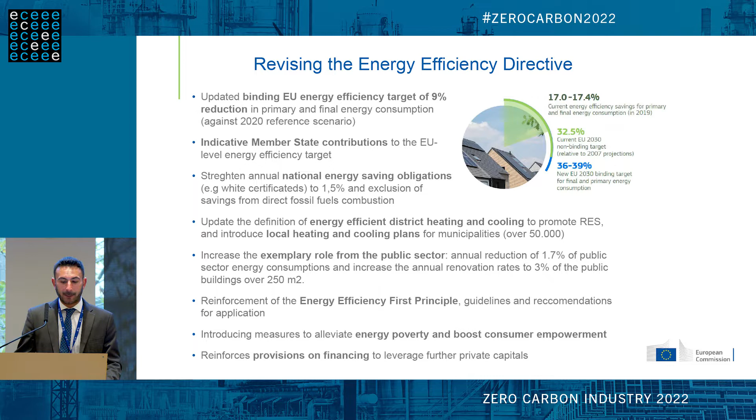There is something related to industry and SMEs in there, and that's the EED, which, as you know, was recast, increasing first of all the ambition of targets for primary and final energy consumption, but also looking into updating and revising the obligation for companies to undergo energy audits every four years and/or having an energy management system.

Now, what came out from an impact study the Commission carried out was that in the current Article 8 of the EED, placing an obligation on businesses bigger than an SME - when we mean SME, we refer to the 2003 Commission recommendation on the definition of SME - member states were facing many problems implementing that obligation, precisely due to the difficulty of applying that definition at country level, since it may vary from country to country, and also the fact that there was no obligation to implement measures recommended by the audit, which would undermine the role meant for them to have.

So this recast is proposing a shift of the obligation from company size to the energy consumption of the company. Currently the threshold proposed by the Commission is 100 terajoules for the obligation to have an energy management system in place, and 10 terajoules for an energy management system or an energy audit. The latest developments are that the European Parliament is trying to go even beyond, proposing to lower these thresholds, which would practically increase the number of companies that would fall under the obligation.

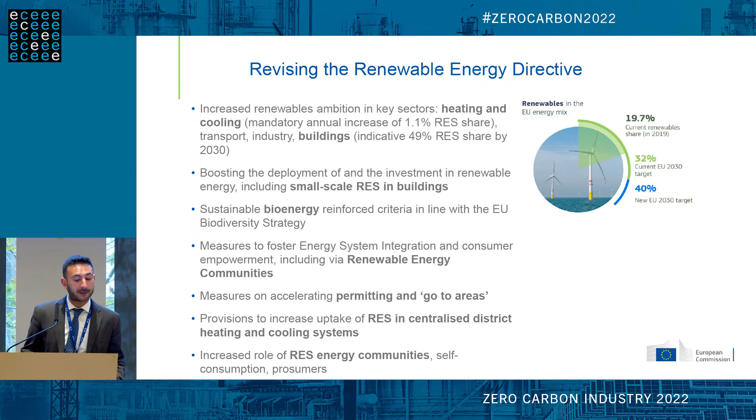That's an opportunity for them, and that's for the longer term, what the Commission is doing to support businesses in the clean energy transition. In the shorter term, REPowerEU is the instrument the Commission has put forward to phase out dependency on Russian fossil fuels by 2027. Rooftop solar, heat pumps, and renewables in general are at the core of the strategy, based around three pillars: accelerating the clean energy transition, reducing demand by becoming more energy efficient, and diversifying energy sources.

Linked with energy audits, as part of REPowerEU, the Commission issued the EU Save Energy communication, which, on top of a short-term and long-term view, in the short term calls for energy savings through small behavioral changes that everyone, including businesses, can make. On top of the long-term outlook, which looks at strengthening structural change towards energy efficiency, the Commission was also asking member states to consider additional measures and improvements, amongst these, the strengthening of the implementation of energy audit results. Why is that?

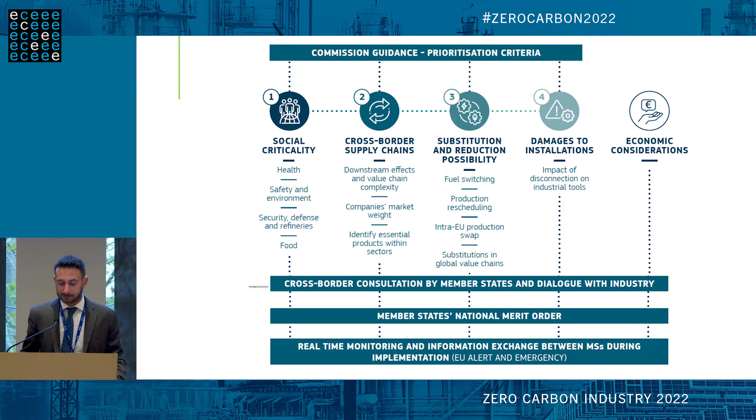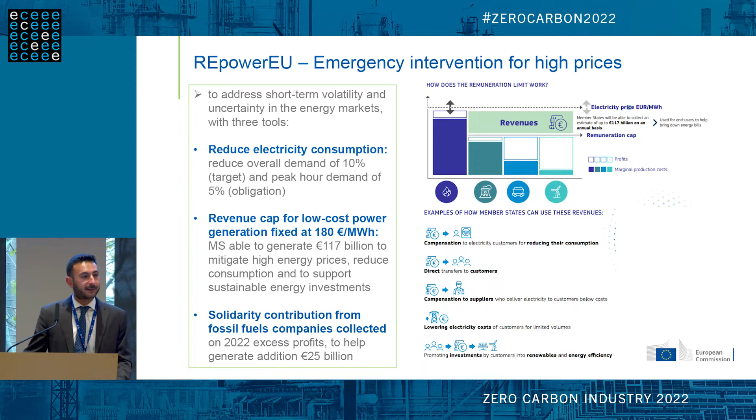Finally, the most recent emergency intervention for high prices is an initiative the Commission is putting into place to try to use the extra profits made from low-cost power generation as a solidarity fund, so to speak, that member states can use, for example, to compensate consumers, why not also small businesses, and to help promote projects at local level that go in the direction of renewables and energy efficiency. I will stop here. Thank you very much.

You said in the Energy Efficiency Directive recast we have this 100 terajoules and 10 terajoules threshold, and I was also informed there's still discussion with the Council going on to lower this level. Are we talking about 50 terajoules and 5 terajoules, or do you have an idea in which direction or where the limits will be?

So the proposal of the Parliament is to reduce from 100 to 18 terajoules the obligation to have an energy management system, and from 10 to 3.6 terajoules for the obligation. That's a very big step, and I think very good news for the energy efficiency community.

We did about 2,500 energy audits over the past years, and we could really see that the energy audit is nice because it identifies issues, but in complex industrial processes, energy management is much more efficient because it's done internally with external help. So lowering these thresholds from 100 to 18 and from 10 to 3.6 is a very big step. Very good news for us.

Thank you, it's related actually. In the past we always had this problem that there was an obligation for energy audits but no action on the audits, because it's one thing to audit and make a statement - this is not working well and you need to improve - but then you can put it in your drawer and never look at it again. So how do you see it with this recast? Will there be an obligation to act?

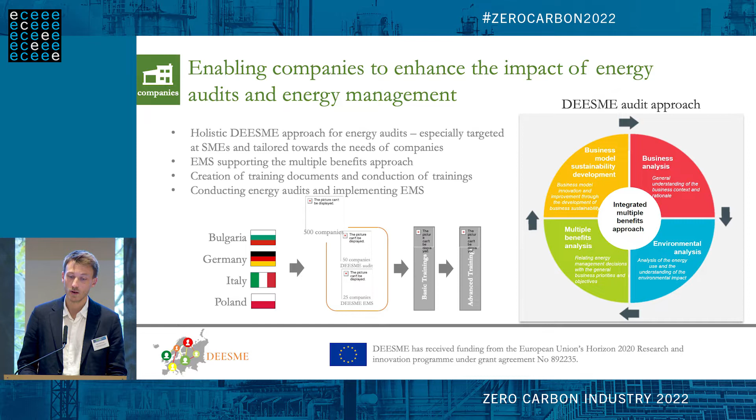We are conducting trainings in 4 selected countries: Bulgaria, Germany, Italy, and Poland. Two rounds of trainings where we are trying to guide them to implement this improved DEESME approach.

The other side of the project focuses on national authorities, and this is the part where we, as Fraunhofer, mainly contributed. What we did there, we first scouted for which challenges actually exist on the European market. We did surveys and interviews with selected national authorities on the European level.

We identified 10 challenges, and then we added an additional challenge focused on the non-energy benefits. We distributed them into ones that affect non-SMEs and ones that affect SMEs, then subdivided them into a total of 27 sub-challenges. I will give a few examples of those later on.

We then went back to the member states, and this time looked at all the European countries, asking: for these challenges, which best practices already exist? In this process we identified 50 best practices, and based on that we derived 55 solution strategies for those 10 generic challenges. We transformed those into an interactive guideline document, shown here with a barcode so you can access it online, and then distributed it back to the national authorities as a hands-on guide.

I will provide a few insights into those challenges and the solution strategies. The first challenge is the limited resources for transposition.

The challenge is that the cost for national authorities to transpose Article 8 of the Energy Efficiency Directive can be separated into the initialization cost at the beginning of the process - you have to implement and set up the system, identify the companies - and then reoccurring costs, because every 4 years companies have to do the audits, so you have to monitor what is going on and do continuous work. There's a trade-off between both types of costs.

One of the best practices we identified here is an automatic submission platform for companies, where they type in the results of their audits. It's still common in many countries that audit results are sent via email, as a Word or PDF document, and then the national authority has to collect it from all these companies - it's quite a hassle. Digitalizing this process is a good example to mainstream and make it much easier to process the data and monitor both what is going on and the success of the energy audits.

A second challenge I want to touch on is the quality of the energy audits. I think there are three factors which influence this. On one hand, you have the quality of the auditors, which you can influence by requiring certain certification schemes to make sure they are well qualified. Some countries mandate certain job experience or trainings, and you can also provide a list of certified auditors. Some countries allow auditors from neighboring countries to also work as auditors in their own country, which expands the scope of people who can do the audits.

In Germany, in terms of informational measures, they implemented a Förderwegweiser - a funding guideline - an interactive website where companies or private people can go to find the proper funding scheme. In Germany we have many different funding schemes available, and it can be a bit of a jungle differentiating between national and regional funding opportunities. On this website you click whether you are a small or large enterprise, and it guides you through which area you're looking for funding in, which type of funding, and in the end provides which funding scheme would be suitable for your company.

And now a bit about the recast of the Energy Efficiency Directive. In 2012, the Energy Efficiency Directive basically came into force. We saw some amendments, but nothing touched on Article 8. Now we've seen this proposal for a recast in 2021, which actually changes Article 8, which is no longer Article 8, but now it's Article 11, called Energy Management Systems and Energy Audits. We saw already these thresholds proposed by the commission: 100 terajoule for implementing an energy management system and 10 terajoule for energy audits, and hopefully they will get even reduced with the proposal of the parliament.

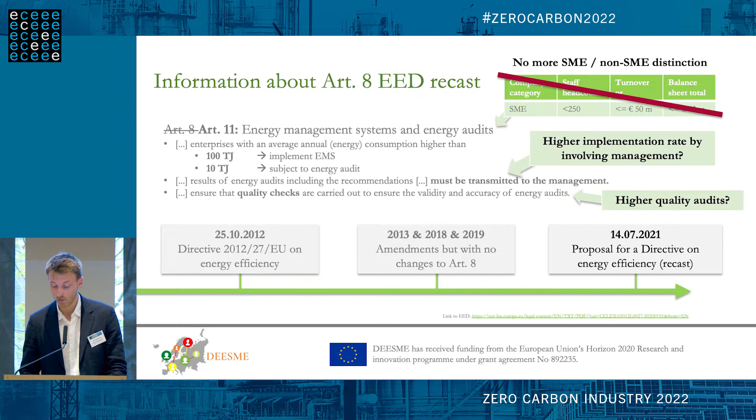There's also a paragraph to ensure that quality checks are carried out to ensure the validity and accuracy of the energy audits, which might lead to higher quality energy audits. And we already saw the example of the Netherlands, who actually go even beyond what is proposed now in the recast of the Energy Efficiency Directive.

They say you have to implement all energy savings measures with a payback of 5 years or less. And in Germany, which is the last example I want to give, they introduced a new ordinance now in September 2022.

It's very recent, and it bears a very nice name: Mittelfristige Energieversorgungssicherungsmaßnahmenverordnung. I think only Germany can create such names, and in English it translates to Medium-Term Energy Supply Security Measures Ordinance, from September 2022.

This is a very short-term measure, valid only from October 2022 until October 2024. It contains, as the title says, short-term energy-saving measures. One of those measures is that companies are now obliged to implement all measures that are economically feasible in terms of energy efficiency.

Germany also has a norm to define what it means for a measure to be economically feasible: the DIN EN 17463. It's defined that a positive net present value must be reached after a maximum of 20% of the useful lifetime of the measure.

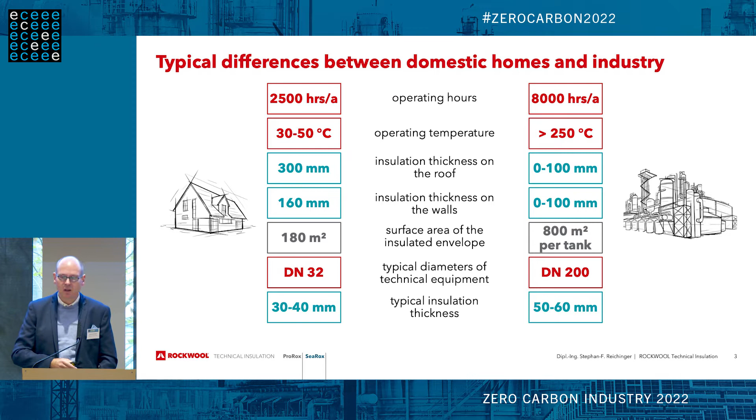In industrial buildings, we're quite often talking about DN50, DN80, DN200, and even larger pipes, depending on the facility. The typical insulation thickness at home, since everyone says energy losses go into the building, is quite often the diameter of the pipe, so 30 to 40 millimeters. In industrial facilities, it's 50 to 60 millimeters, just to reach personal protection. So, do you agree or disagree?

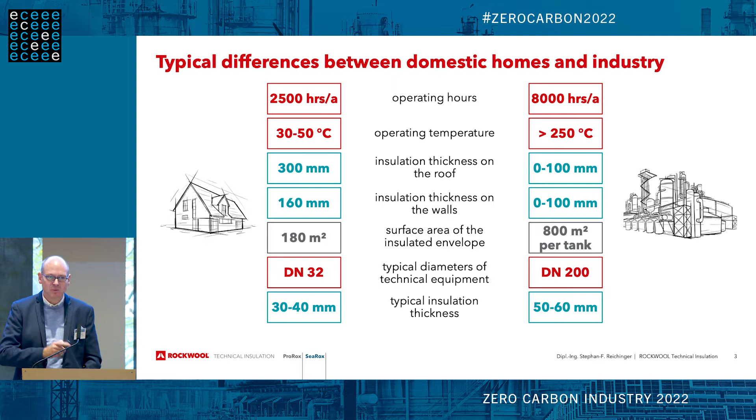You agree. Perfect. So that's the reason why we have the so-called tip checks, and this is now for how many years? 12 years now, the way of making energy losses visible in the plant. You see me here together with colleague Luis Lopez-Brunner, who's also working as technical director at the EIIF. We've been visiting a plant together, and you see I'm checking the temperature of an uninsulated pipe, in this case, located outdoors.

What we're able to deliver, or make visible, is not this pipe, because the pipe was too hot for the heat flux measurement tool. We're able to make the heat loss visible, the watts per square meter visible. You see that the curve isn't smooth, it's going up and down, and this is quite typical for uninsulated elements.

Uninsulated elements are very strongly dependent on ambient conditions. You see the blue line is the wind speed, and whenever the wind speed goes up, the energy losses also go up. But in total, we can say we have a more or less stable heat loss. In that case, it was a massive heat loss of nearly 1 kilowatt, so we were at 850 watts per square meter.

This is the example of the storage tank, which you'll see on the following slides, to make a comparison between what we're measuring and what we're able to save, or what the plant owner is able to save if he invests in better insulation, or in any insulation, because quite often some flanges and valves are still uninsulated. We have the possibility to calculate also the energy saving potential based on European and global standards.

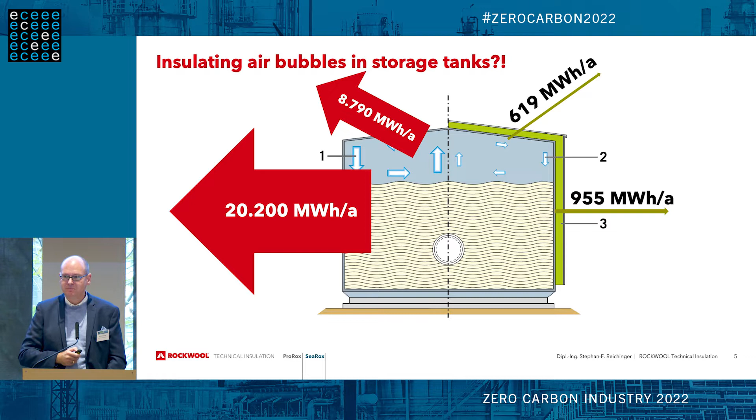This was one example of a tip check which I made in Southwest Europe some years ago. You'll see it later in a larger picture. I don't want to go into detail, but there you have the comparison calculations.

If you take your phone and scan the QR code, you have the possibility to download the article, the calculations, and some supporting documents, including information about Rock Assist, if you're interested in saving energy in your plant. You just have to agree with one checkbox to download all the documents.

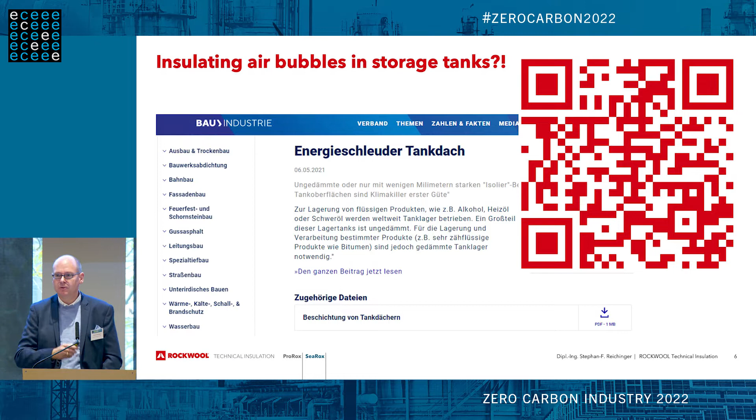Now I would like you to scan another QR code, because I would like to know from you what you expect - how much is the energy saving potential of such a storage tank.

The majority has chosen that the energy potential is at 95% or more. So hands up. Perfect. Then close to the majority, persons have chosen that the energy saving potential is at 80%.

Comparing the real figures - if we compare insulation or heat losses through insulation compared to uninsulated elements, it's quite massive. In some cases, when doing tip checks, at least 95% can be saved, and very efficient systems are even going up to 98% in case of uninsulated elements.

The payback time, of course, is quite low in the case of 95% energy savings. Besides the energy savings, you can also reduce CO2 emissions, because the energy is somehow created, and if it's created by fossil fuels, you're saving also a lot of CO2 emissions.

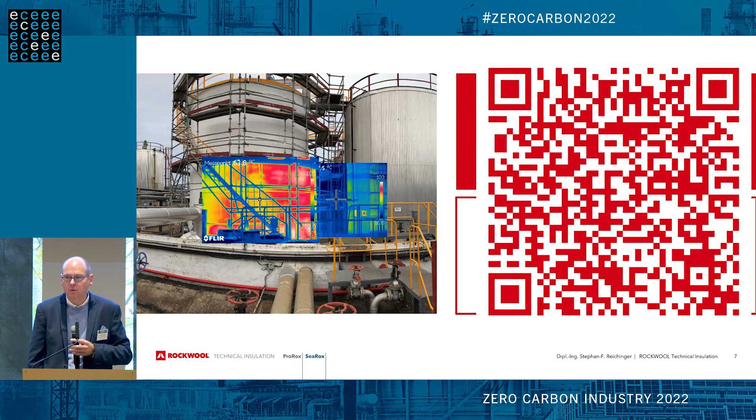These figures are calculated with former energy prices, so it's not incorrect to expect that return of investment can be achieved within 1 year with current energy prices. So that's it from my side.

If you want to save energy in your plant, if you want to discover energy saving potentials, I would be very happy if you would get in contact with me. You can scan this QR code to get directly the phone number. Thank you very much.

So you can definitely see how enthusiastic tip check engineers are about the work they do. He could have easily spoken for an hour and gone more into detail. What you should really take away is payback is very short - 95% can be saved when we talk about uninsulated equipment. In our 2,500 audits, we found about 10% of equipment is uninsulated or covered by something damaged. It's a no-brainer, and the 2,500 examples show there was not one plant where we didn't find potential. We talk about 1,800 HVAC systems in hotels, hospitals - so building equipment is also very interesting to look at.

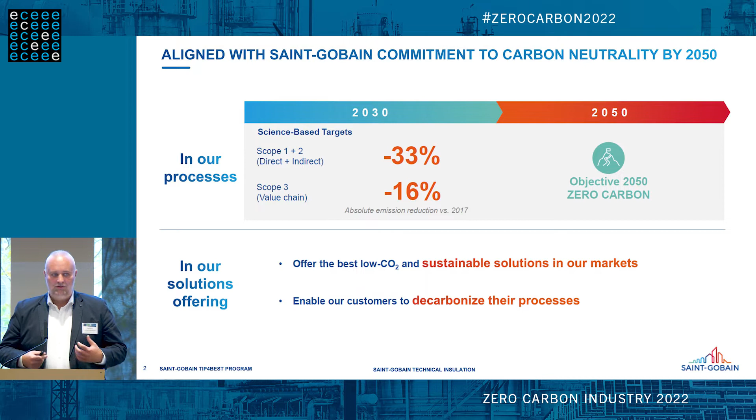That's what we do on the inside, but also our customers, of course, our clients, we try to help them to achieve these goals as well by offering low CO2 solutions and products in our markets and enable our customers really to go the same way and to decarbonize their own process.

In order to do so, we have an internal program. It's called, as Andreas already mentioned, TIP4BEST. It's a bit of a bric-a-brac abbreviation, I'd say, but the tip comes, of course, from tip check, so thermal insulation performance. And the best is our abbreviation to boost energy efficiency, of course, but next to energy efficiency, also safety and temperature control.

There's industry, a lot of focus also on safety, like if you have uninsulated equipment in a plant, this could also be a safety hazard. So it's always good to tackle those topics as well. And temperature control, if you have an optimized temperature control in your process, if you can keep that more constant, let's say, also the production quality of what you make can be increased. These are additional benefits of doing energy efficiency measures.

So these objectives are two. First of all, again, internal audits. So we have a program to audit actually all our plants around the world. It's a big step, but we started with it, as you can see, already a few years now. But also by doing this, we want to show that we are a big industrial group and we're not different than any other big manufacturers. Even though we make insulation ourselves, we always have to prove this as well.

And we want to do this to show our customers that this is the right way to do it. Like we do our work, let's say, to improve our energy efficiency, and we will support our customers as well doing the same thing. And one of the examples is, for instance, that we have a partnership now with Käfer to do this kind of tip checks with their customers.

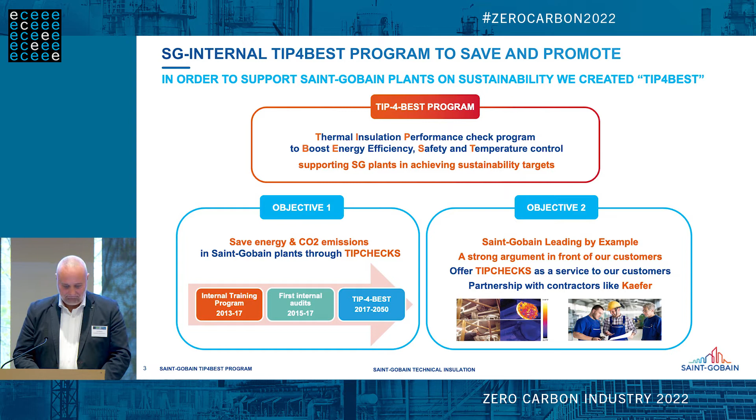We are now about 12 to 13 certified tip check engineers within Europe. At the end of October this year, we've done almost 270 tip checks. As you can see, from 2018, there's been a boost actually in doing so. The numbers dropped down a bit because we've excluded Russia in our activities for known reasons, I guess. And if you look a bit at the repartition of which sectors we've done these audits, it's mainly in the chemical industry and in power generation, actually. So this is where you can find the audits that we've done with our Saint-Gobain tip check engineers.

More important, actually, what were the results of those things? So if you accumulate all the energy savings that we, just with our team of 13 engineers, have seen, you can see here that after all those audits, we're almost at 1,000 gigawatt hours per year and 250 kilotons per year of CO2 emissions reduced based on the audits that we have done. I like to use what Andreas very often said: you do this investment in those measures only once, but then every year the savings are recurring, of course, so this is a very big cumulative effect.

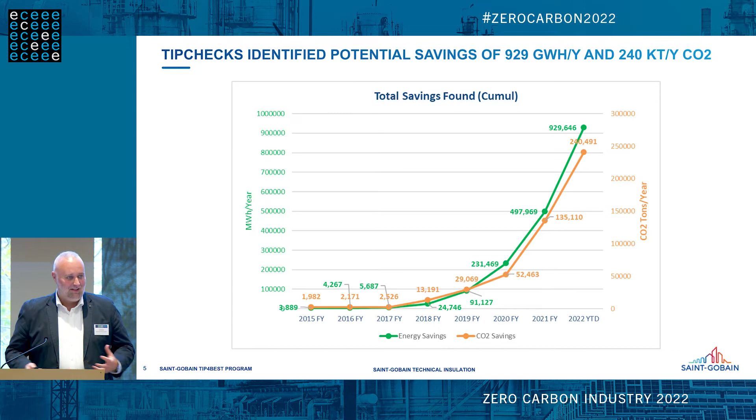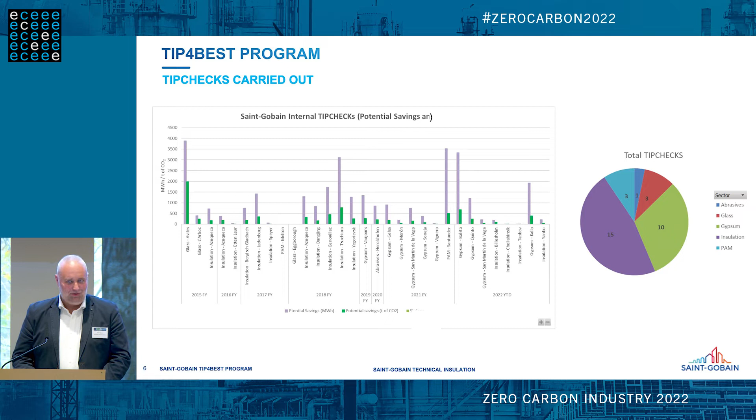It brings me already to the end of my presentation. It's very short, actually, to tell you what we are doing. Energy auditing is a very easy way to see low-hanging fruit, as I call it. It's very easy to get savings from that, and by doing this ourselves as a company, we want to prove to the rest of the industry that's the way to go, and we can always help you in that as well.

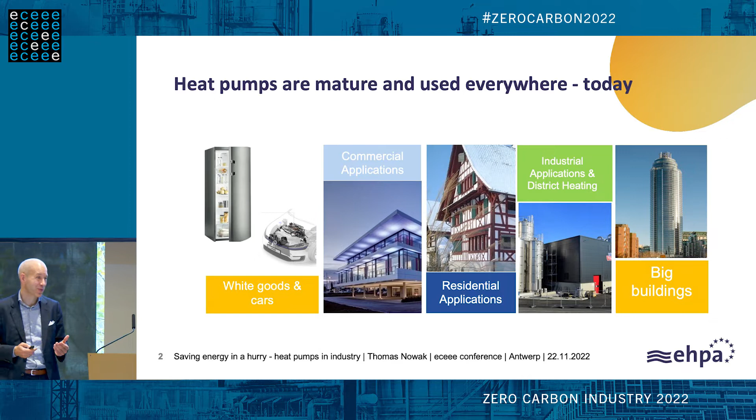We, as European Heat Pump Association, represent manufacturers and stakeholders from every stage of the value chain, and we are mostly looking at commercial applications, residential products, industrial applications, and district heating and big buildings. When I met Niels and he told me about this conference, I said, well, are you talking about heat pumps? And he said, well, not so much, but it's very important. So then I said, well, I'll make it possible.

A few words on the total market that we are looking at - this is mainly residential. That's more my style, I like that better.

So it's mainly residential. We are looking at an incredible increase in 2021, plus 34%. And we expect that similar growth is possible throughout this decade, so we would arrive at 4.4 million heat pumps in 2025, and this is also the target that the European Commission has set itself under REPowerEU, doubling annual sales.

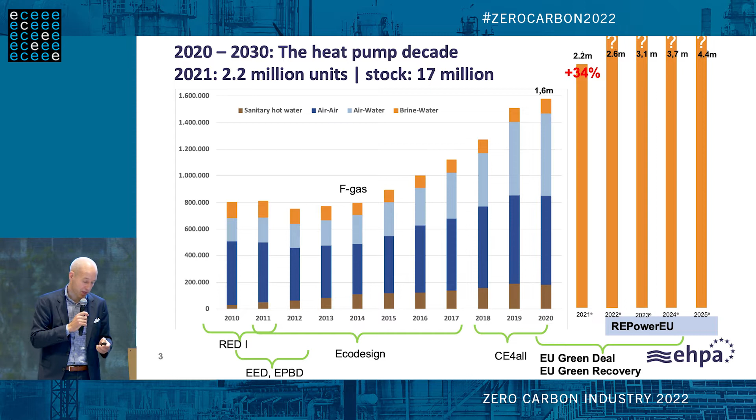This is not applying to industrial heat pumps, even though the potential is probably even bigger, as I will show in a minute. There's a lot to be said about how heat pumps are recognized now in policy. I'm picking out one slide - this is the first time I saw the Commission putting a heat pump onto one of its banners. This is the announcement of the REPowerEU communication and package, and you see here a residential unit. Of course, you could also put an industrial one there because industrial heat pumps are recognized in this document. The document itself focuses on photovoltaic, wind, heat pumps, and storage for the decarbonization of Europe's society.

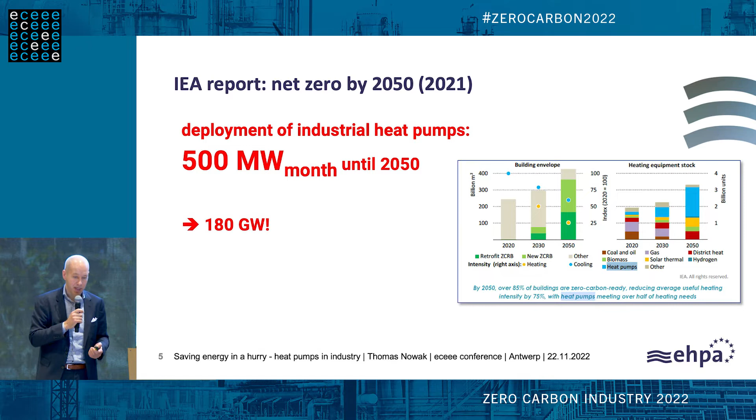But then there's another report that was even slightly earlier. The IEA published this report, Net Zero by 2050, and this is one of the first documents that really makes an effort to estimate how much energy savings we have in industrial applications - 500 megawatts per month until 2050. When I read this first, I thought, whoa, this is really something, but I wouldn't even know who is supposed to manufacture these units. Because even if you look at the big heat pump manufacturers in this world, they probably couldn't do 500 megawatts as of today.

Then there is some scientific coverage - this is a paper by De Boer and others. If you have not looked at heat pumps in industrial applications, I would really advise you to read this, because it has all the brains from the universities and research centers writing it and summarizing their knowledge. They conclude that typical industrial heat demand in Europe, I think it was 2020, is 1,952 terawatt hours, 37% of which is at temperature levels below 200 degrees centigrade.

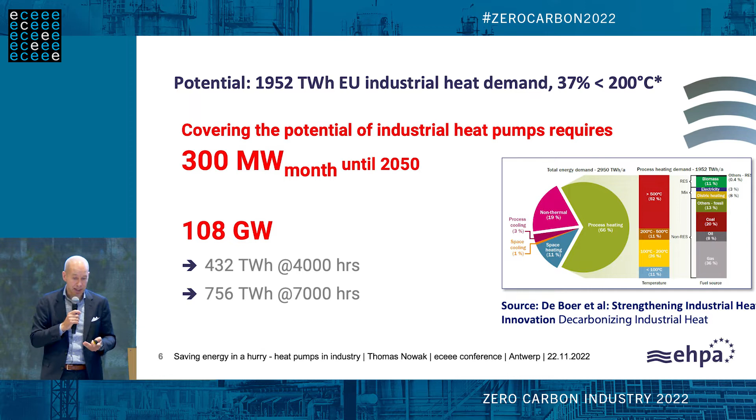So we see that heat pumps can replace a significant part of Europe's heat demand in these temperature levels, but it will require some heavy lifting.

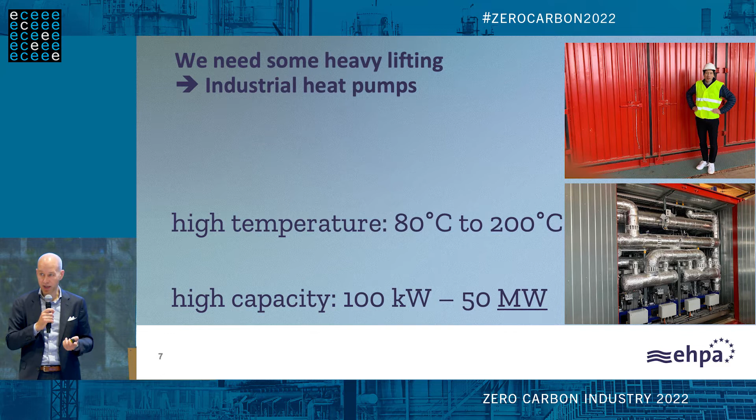So we can do temperatures 80 to 200 degrees centigrade on the sink side. So if you want to do 200 degrees centigrade, you need a source that has a similarly high temperature - you cannot go from 20 to 200, otherwise you have to take a multiple step approach. Or you need a larger capacity, and you can provide capacities up to 50 megawatts. We are now looking at a district heating heat pump in Denmark that has that capacity, and quite typical in Scandinavia, they have similar devices like that, couple of tens or hundreds.

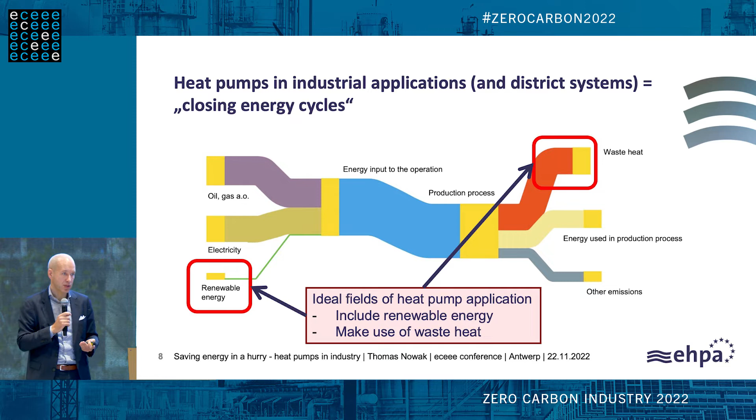If we look at industrial applications, we typically look at closing the energy cycle. So the ideal case, you take the waste heat - that's why the title I gave this presentation. You take the waste heat from a cooling process or from something else and bring it back to the beginning. And from a European policy perspective, waste heat is going to be considered the same as renewable energy - rightfully so, obviously, because for the energy system, it doesn't matter if it's waste heat or renewables.

Quite often this is only a question of terminology, because people will talk about cooling requirements and then just discharge the waste heat into the environment without using it. I think that's the fastest way we can really save energy today.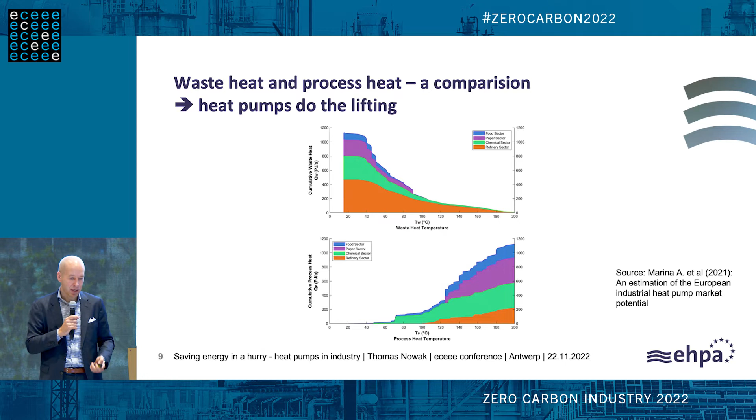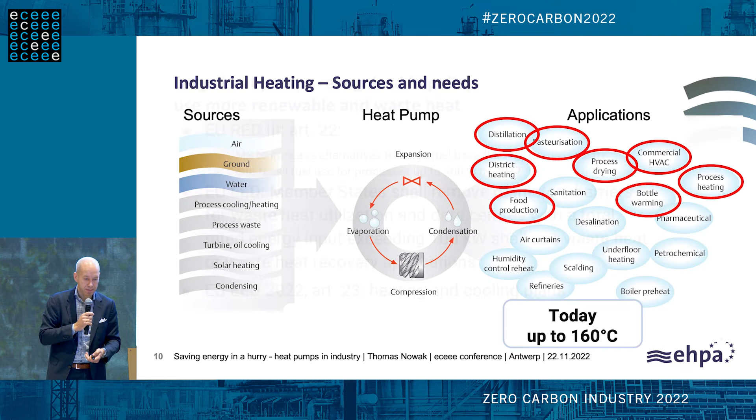In policy, and that is really important because it wasn't like that before, we have a recognition in the Renewable Energy Directive. There is now in the new Article 22 a mandate for member states to increase the alternatives to fossil fuel-based energy use and to phase out the use of fossil fuels for processes up to 200 degrees by 2027. As I've said, that cannot all be done by heat pumps, but it can be done by a mix of different technologies, and heat pumps can for sure go to 140, 160 degrees today.

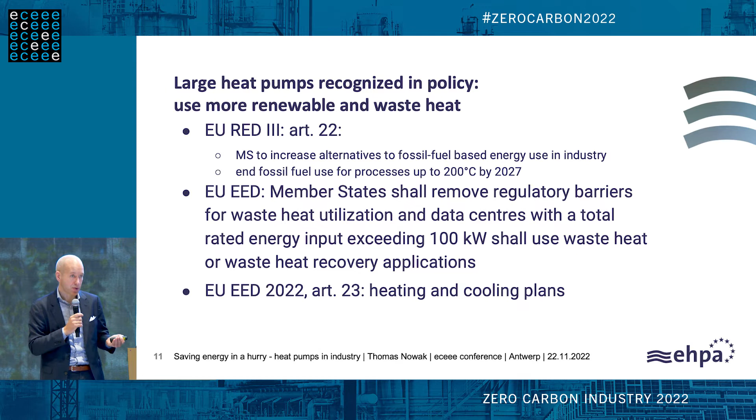The Energy Efficiency Directive makes a similar requirement, and what is now, it's not entirely new, but in the new directive currently under discussion, Article 23 says big cities need to create heating and cooling plans, and ideally, obviously, they will also use the waste heat to close the energy cycles.

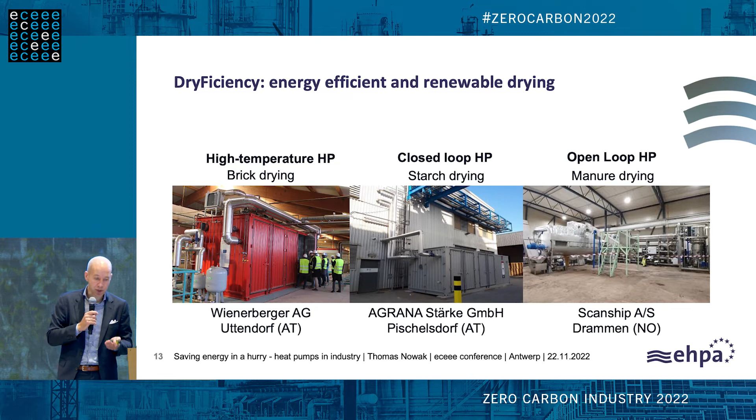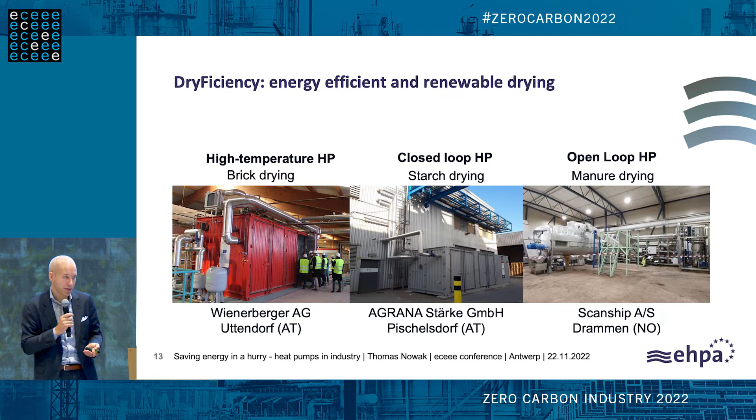Then I have a few examples that I brought. This is from the DryFiciency Project. These are all operating today, so it's really something where we say it's not conceptual, but these are operating in brick drying in Austria, in starch drying also in Austria, and in manure drying on ships. Because if you go on a cruise, there's a lot of human manure created that needs to be dried because it can't simply be discharged into the environment.

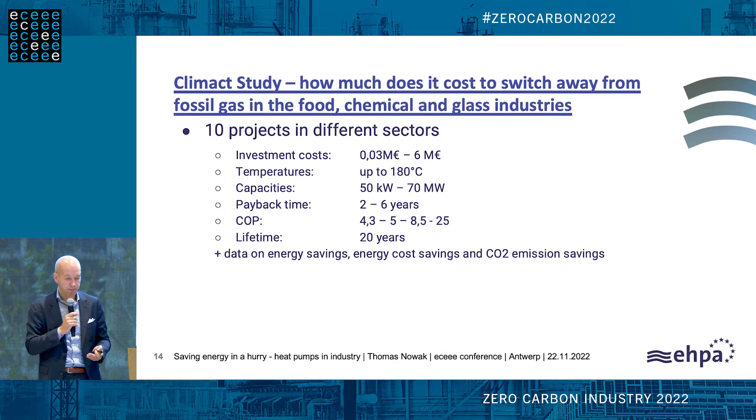I want to take that opportunity to mention that we, as European Heat Pump Association, are cooperating at the moment with CEPI, the Paper Industry Association, on a project where we want to bring together the technical people from the paper industry with the technical people from the heat pump industry to develop standardized compressors for paper processes.

Because one of the things we are looking at whenever we look at industrial applications is that everything is one-of-a-kind projects. And we are missing standardized solutions that could be mass-produced and could be deployed on a mass scale.

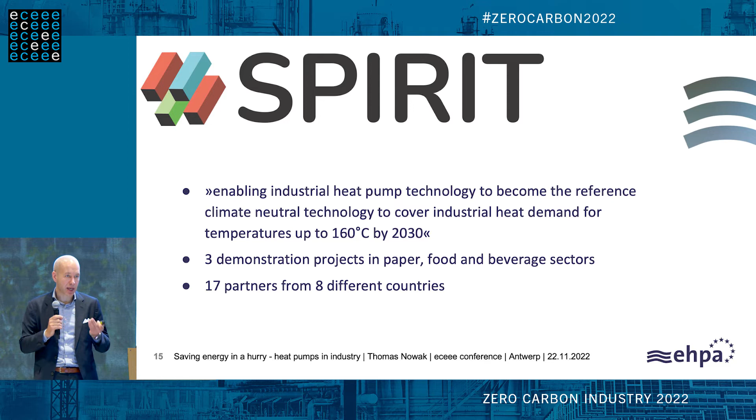Especially, for example, for dairy plants. A dairy plant should be the standard application for heat pumps, but it's not. A brewery should be a standard application for heat pumps, and it's not. So we have a lot of applications where you could say, technically speaking, it makes absolute sense. In reality, it's not the situation.

So I brought this, green stills, and you can see here, you bring all the components, all the produce into the factory at 10 degrees Celsius, you do something with it, and then you bring it back again at 10 degrees. So if we could just keep all the energy inside the factory, that would be quite helpful. What is done here is really the prototype of closing the energy cycle.

It's happening as we speak in the UK, and actually there is going to be a distillery in Ireland going into operation either end of this year, beginning of next year. So I'm very much looking forward to the first whiskey drums after 10, 12 years.

Then we have this, which received a prize. If you know of good projects, we are handing out a heat pump award every year.

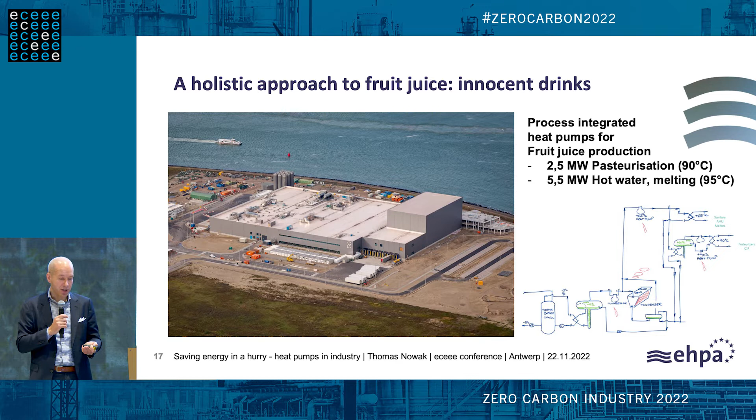This is the Innocent Drinks factory in the Netherlands, and it uses 2 heat pumps to close again the cycles, one for pasteurization, one for hot water and melting. So you have a most energy efficient plant for fruit juice production.

And I think that's the second last. Sweets is always good. Mars in Veghel also in the Netherlands. And you see again that the process is integrated.

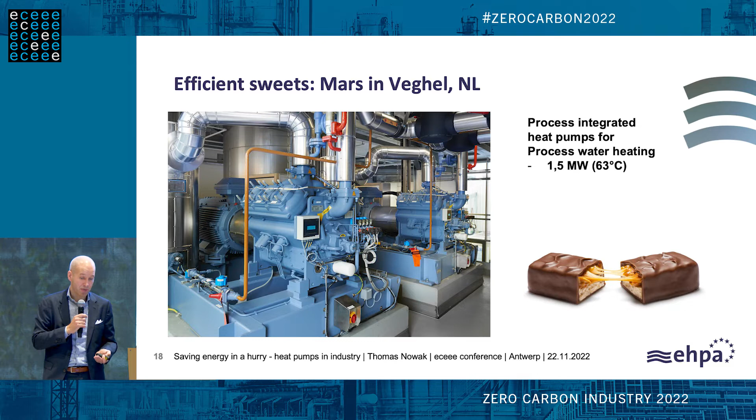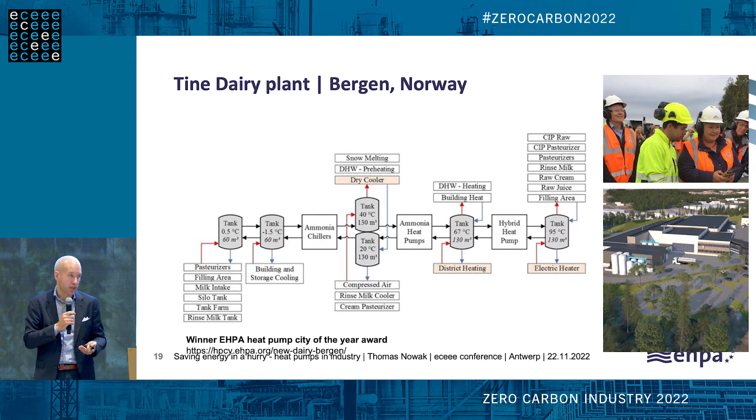You can use heat pumps for process water heating, and it's 1.5 megawatts, so by no means small devices. Then there's my prototype of the dairy plant, Bergen in Norway. They are connected to district heating and have really closed the energy cycle, and that's operating today. That should, in my opinion, be the blueprint for all types of processes that operate in the same manner. Last one, and now we come to the motto of this presentation: use of waste heat.

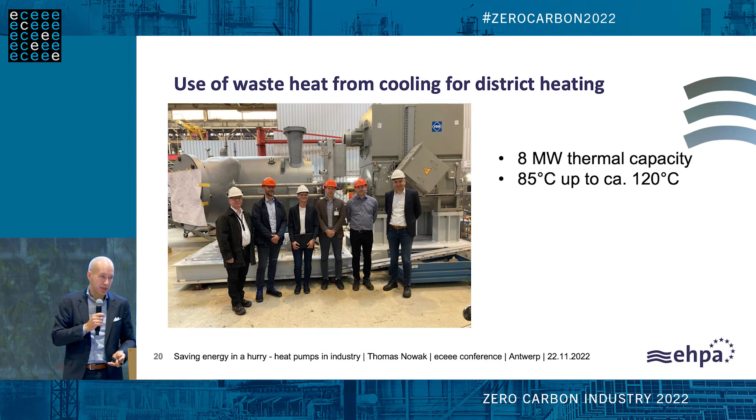This is an 8 megawatt heat pump recently installed in Berlin. It's using the waste heat from the cooling at Potsdamer Platz, from all the hotels and office buildings, and is now using it to provide heating for the surrounding buildings, feeding it into district heating. Here we have 85 degrees up to about 120 degrees. The refrigerant is 1233ZD because of these temperatures above 100 degrees centigrade.

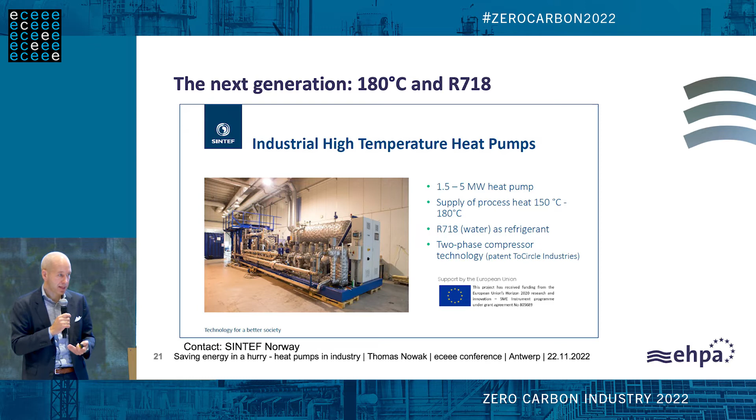The future may look like this: a 180 degree heat pump prototype operating in Norway at SINTEF. It has already been running, so it's conceptually proven that it works, and they are working on developing it even further. I want to close with a thought for you to take home.

I talked to one of our members, and he told me we have 60 gigawatts of cooling capacity installed in Europe. If we consider that the waste heat is bigger than the cooling, about a factor of 1.2 for cooling capacity to waste heat capacity, then if 60 gigawatts are operating, they are providing 72 gigawatts of waste heat capacity. If you operate them at 3,000 hours, that's 210 terawatt hours.

If you were to provide this heat with gas instead, it would be 21 BCM of fossil gas at an efficiency of 90%. Europe is importing 155 billion cubic meters of fossil gas from Russia. And this is only one manufacturer that is doing this.

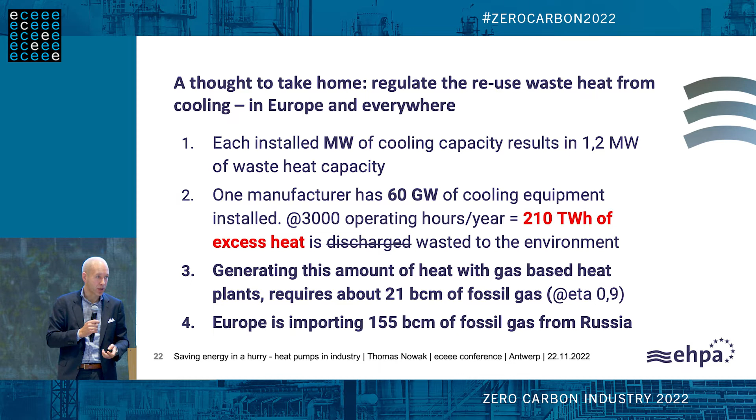So when the Director General of DG Energy, Ditte Juul Jørgensen, came to us and said, what can we do fast, what can we do before this winter — that was in March — I said to her, this is what you can do this winter, because all these sites already have a permit. You just need to put a heat recovery unit on all the cooling applications, and you will save tremendous amounts of fossil gas immediately.

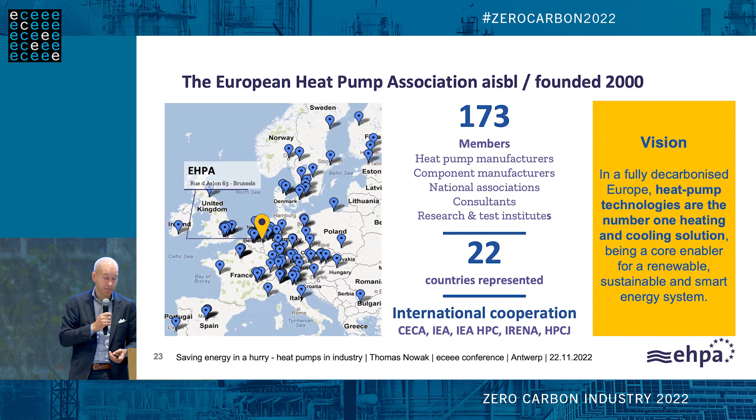So yeah, impressive, putting a few heat pumps in some plants, and we're there. So that's exactly what we had.

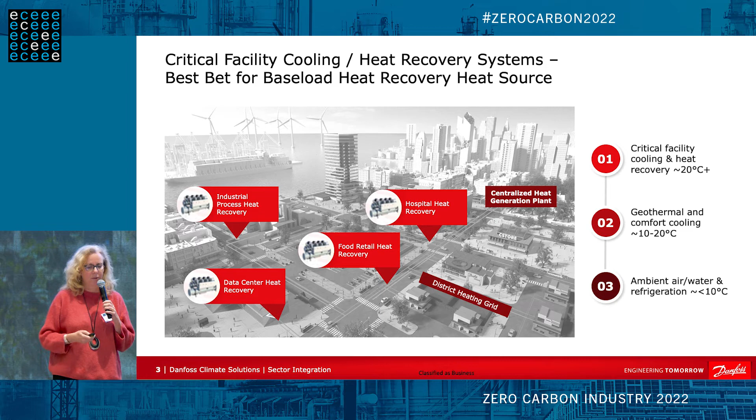So when we're looking at Danfoss specifically, this is just an example from our campus, but it's applicable to all sorts of production sites. A little bit like the gentleman from Saint-Gobain was saying, we also have a commitment to become carbon neutral by 2030 in all our global operations, in Scope 1 and Scope 2 emissions. At the forefront of this commitment is our campus in Nordborg, where you can find the headquarters of Danfoss, which will actually be carbon neutral by the end of this year. So this is really our front runner.

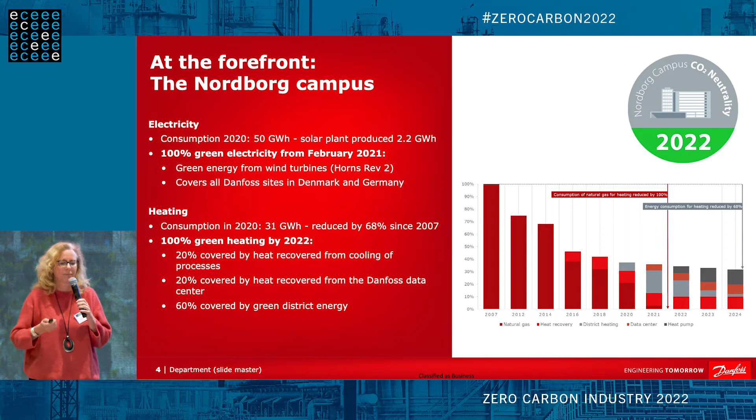As you see here on this slide, we have on one hand the electricity, on the other hand the heat. In terms of electricity, it's pretty straightforward — it's green electricity. And then if we're looking at the heating, that's where this presentation comes into play. There it is very much about recovering the heat from the cooling processes in our plants and also from the data center, and then the rest using green district energy. All of this is connected to the district energy network of the Nordborg village, which is a small village in the south of Denmark.

So I'm just clicking this up. If we look a little bit closer, this gives some insight into how this works and why it's very energy efficient and also avoids wasting energy. It's basically a sort of symbiosis system which produces the cooling on one hand, and on the other hand recovers the excess heat from the cooling, which can then be used for heating, upgrading it to the temperature needed.

If we look at the coefficients of performance, if we only had an air-cooled chiller to produce the cooling, the coefficient of performance would be 5.7. If we only had a water-to-water heat pump, the coefficient of performance would be 5.3. But if we bring it together in this combined heat pump, where we produce the cooling, recover the heat, upgrade it, and then use it for heating, we have a total efficiency ratio which is much higher — 9.5. So on one hand this is super efficient, and on the other hand it also makes sure that we don't waste energy. And in the situation we're in today, we cannot really afford wasting energy.

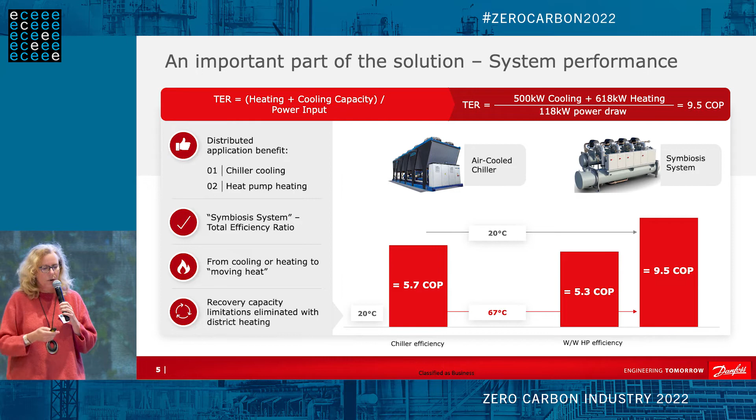And it is a very quick measure, as Thomas was also already saying. So if I'm just summarizing what we've been doing in this field in terms of recovering excess heat and having this symbiosis approach, this is an overview of the projects we've been running over the past years — more than 140. The top graph shows the number of projects selected according to where the cooling and excess heat is then needed. As you can see, process cooling is one of the big priorities where this symbiosis approach has been applied, but there are also a lot of other applications where this obviously also works.

And then at the bottom graph, you see the average temperature ranges on which this is operating, and there you can also see that there is quite a big span. So there is a large opportunity to use those symbiotic approaches between the cooling and the heating. And in terms of a summary, we have the process, the wastewater, the district, and the data center cooling, which represents 44% of those projects.

The gentleman from the Commission earlier gave a nice summary about what's being discussed right now in terms of the Energy Efficiency Directive recast. On one of the slides, data centers were mentioned as well. There is this big opportunity from data centers. We need more and more data centers, everybody knows that. Data centers need cooling, everybody knows that as well. They use a huge amount of energy, that's also not rocket science.

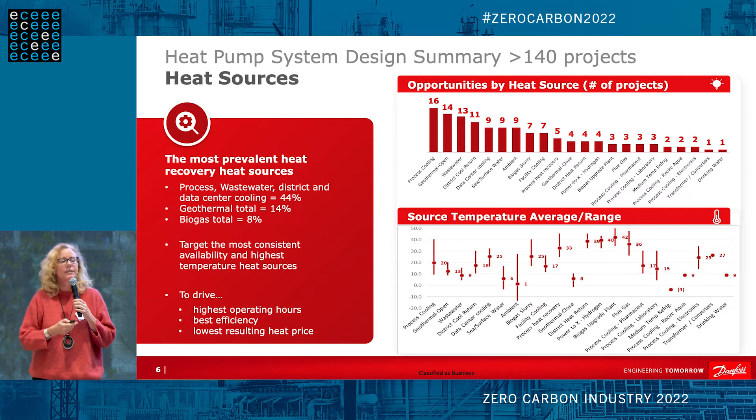So it's really a great opportunity. It's not rocket science, it's a technology which is readily available, which can be used immediately, and can help save energy in a hurry, to come back to the title of this session. I'll leave it here and I'm happy to answer questions. Thank you.

I'm Henrik Adler from the Danish Energy Agency. I've been working with energy efficiency for more than 30 years now, and I still wonder why everybody is talking about the heat from data centers not being usable, because everybody thinks about making the heat at the data center instead of circulating the cooling water in a colder pipeline system and having the heat pump in the domestic heating central instead.

Then you only have to transport 30 degrees, cool it down, bring it back with 10 or something like that. So the domestic heating system takes it and uses it there, instead of generating 70 or 80 degree hot water and bringing it somewhere that only uses it once in a while. I mean, why not cold systems instead of hot systems?

Thank you for the question. I think Denmark is a very good example, because everything I was just referring to is basically applied in Denmark, so it's really a showcase example. Looking at our company, the waste heat recovered from the cooling processes is recovered, among others, from the data center on the campus, and is then used partly on the campus for operations where we need heat, and on the other hand it's fed into the district energy system of the municipality. So both approaches are being done, and if we could do what is done in Denmark everywhere, I think that would be very helpful indeed.

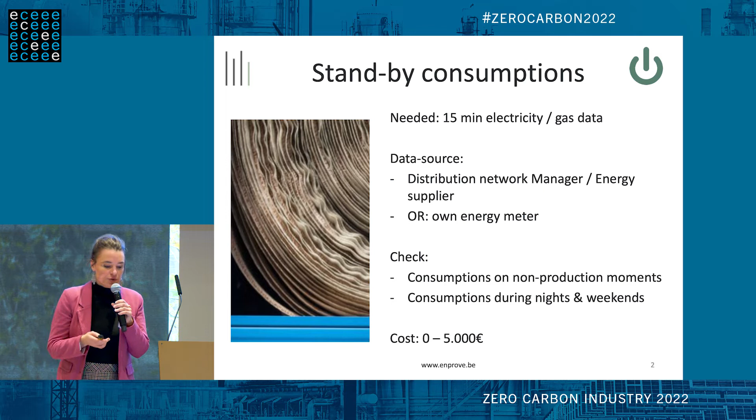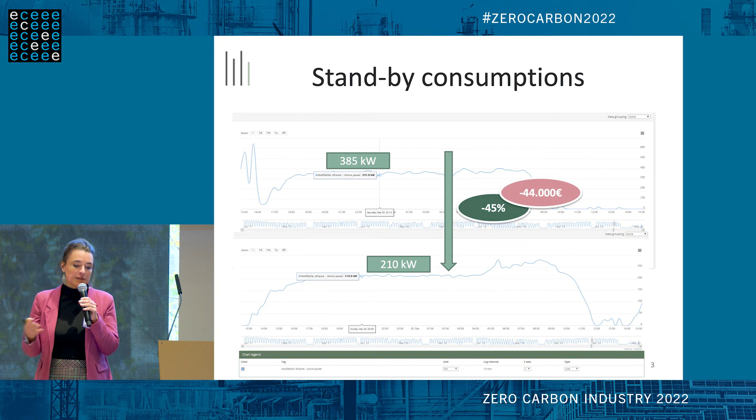The first example I brought here is of a textile company, and they use a lot of gas, they use a lot of electricity, and actually what they did is look at the standby consumption. So what I mean there is they just look at what do we consume during night times, what do we consume during weekends, and you don't need a lot to do this. So in your own company, if you have your main energy meter, you can ask for the data at your energy supplier, or you can ask it at the distribution network. So you don't need a lot of investments. And if you check then what is being consumed during non-production moments, then you often can be very surprised. Like in this case, the company had realized savings of almost 50% on all consumption that was non-production times. So it cost almost nothing. They just took the data that was already available and they looked for potential savings. So there's another reason why you should follow up data more in detail.

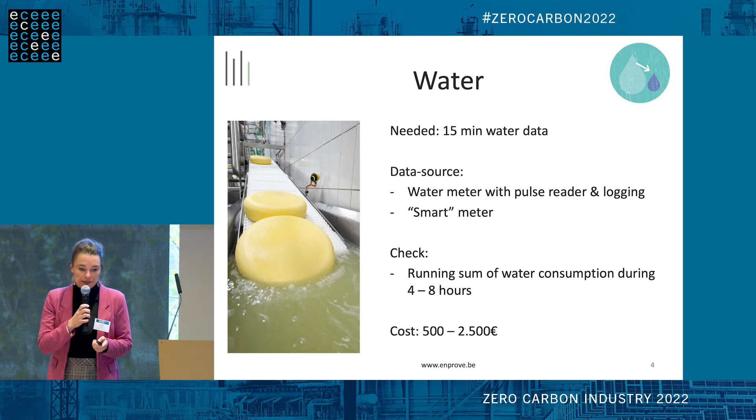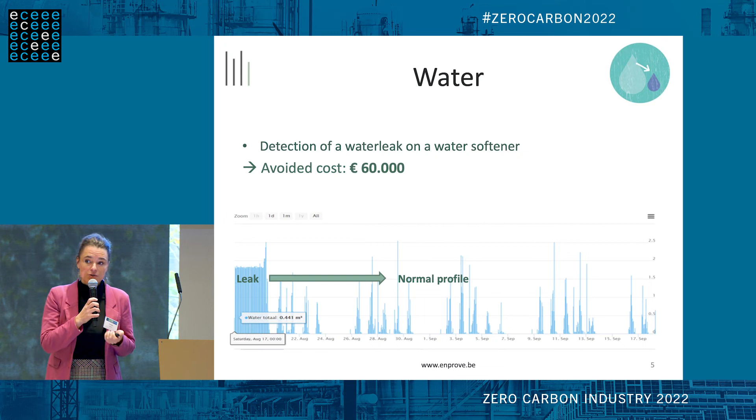Like your electricity consumption, you can easily get 15 minutes data. If you have a lot of water consumption, it's less easy. So there, what companies do is they put a pulse reader on the water meter, so it's a very low budget thing to do. And again there, if you check water consumption and you can put alarms on it, you can avoid a lot of costs. So this one is an example of a company who's in the food industry, they're producing cheese, and they have this water softener who's regularly leaking water in the system. So if you don't measure, it just remains unnoticed. And it's often a very large amount of water and also a very large cost that they then unexpectedly have.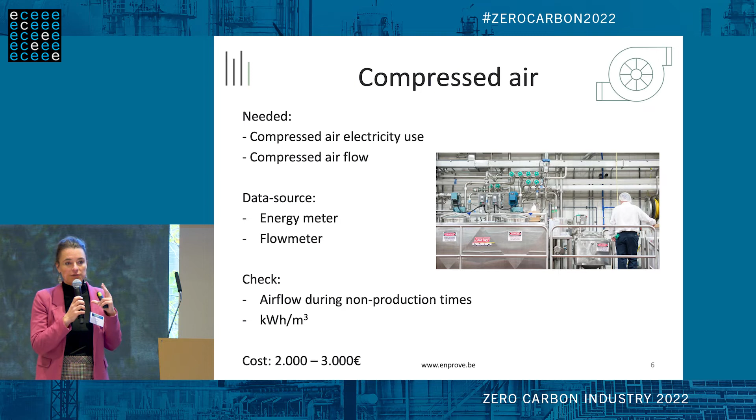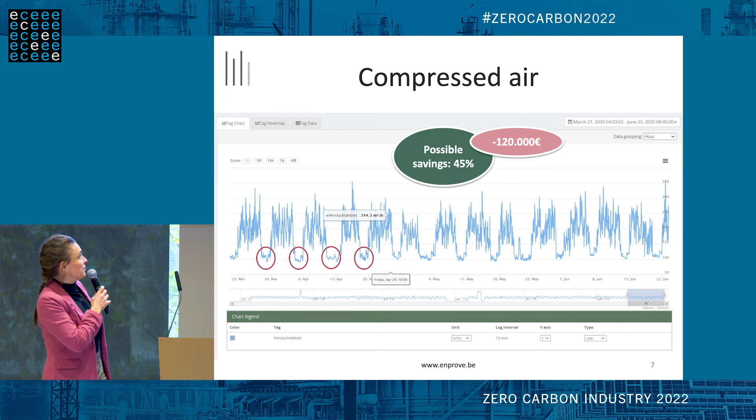I also brought an example from an air compressor, because compressed air is very expensive, it's one of the most costly utilities in companies. So for compressed air, the biggest problem you probably know of is air leaks. So that's why we always suggest, if you have a large installation, to measure the energy use and to measure the airflow. And then if you check the airflow on non-production times, you get an idea of how much is leaking. And if you measure the amount of energy you use per cube meter of air, you get an idea of the efficiency. So this is a first example. If you have here, you can see the energy consumption, and you see at night times there is still energy use while there is no use of air. So if you measure this, you immediately get an idea of the cost. And this is not a cost that you only have during these weekends, it's a cost that you have all the time, because it's because of leaks, so they're leaking all the time. As you see here, in this case, again, it was almost 50% of savings, representing more than 100,000 euros.

This is another graph I wanted to show. This is about comparing the efficiency of a machine. So if you can calculate, if you know your flow of a compressor for a certain time, and you know for the same time how much energy you have been using, you can calculate the energy per unit of a cube meter of air. And what we did is we took 11 customers, and they have similar installations, and we put them in this graph. And you can see most of them are operating at 7 bar, but like number 1B and 2, they're the most extreme.

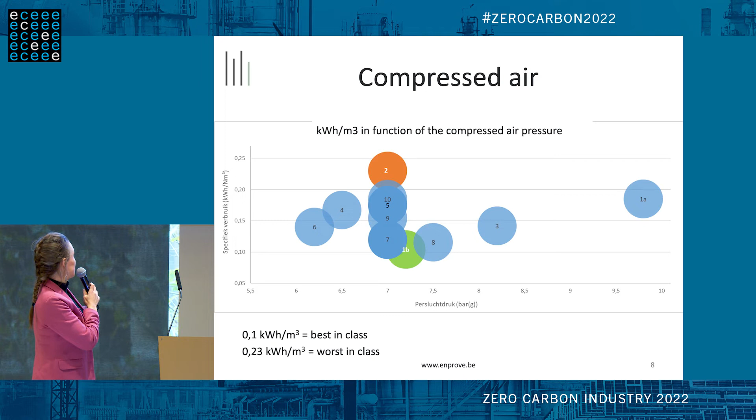The first one is operating at just 0.1 kilowatt hour per cubic meter, and the worst one is 2.5 times almost larger in consumption. For this type of machines, we're talking about 200,000 to 300,000 euros cost a year. If you're operating at the level of number 2, instead of 200,000 euros a year, your cost will be almost 500,000 euros a year. So this isn't really a leak problem, it's really a compressor efficiency issue.

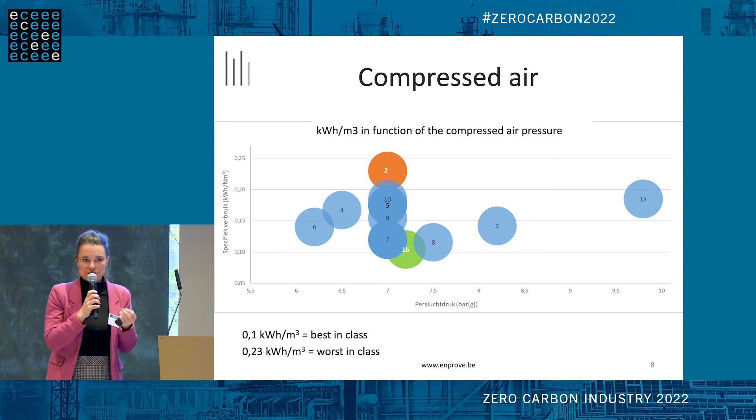There's still heating and cooling I wanted to say something about. Companies can also check on their heating consumption by installing a gas meter, or putting a pulse reader on a gas meter. Installing gas meters can be expensive, but if you have pulse contact, you can read the data from there, and it's very cheap to do.

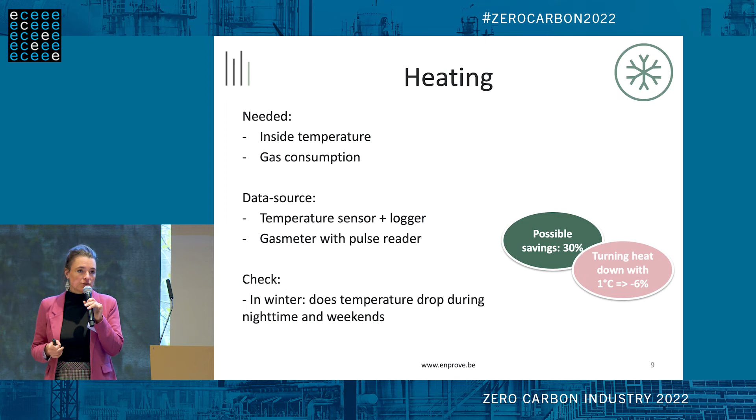There's also a good alternative, which is simply measuring the indoor temperature. Why? Because if you see during weekends and night times that your temperature remains at 20 degrees, you know you're consuming a lot of gas while you shouldn't be. In that case, the savings are around 30 to 35%. Also, if companies turn down the heat by only 1 degree Celsius, they will usually save 6 to 7% on their gas bill.

So that was a very short addition to how you can realize savings in an industrial context.

My first question: did anyone go to their cellar and regulate their heating further down than in previous years? Hands up, is there anyone in the room except me? Of course, I knew I would ask this question, so I quickly changed that. Very, very good, so that's also a little bit of walking the talk.

I have one more question. If water is leaking, how can you not identify it? With compressed air, I understand the air just goes, but if there is water leaking, it must be somewhere in the system, no? Is it just evaporating? The most problems we see with water is that it's leaking, like in a water softener for instance, and they have piping leading to sewage, so it just disappears there. Also, water is usually invoiced with advances, and you get the final invoice at the end of the year, so you just don't notice. You only see it at the end of the year, and if the leak occurred just before the end of the year, it takes another year before you really see it.